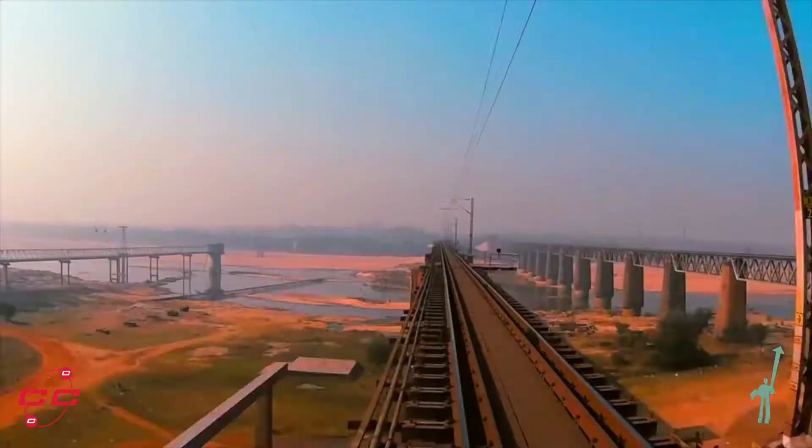The Indian Railways is the backbone of India's economy. Operated by the Ministry of Railways, it is one of India's oldest and most revered institutions. It manages the fourth largest railway network in the world. Such a large network requires over 70,000 running coaches in order to provide a safe, secure and punctual travelling experience to the public.

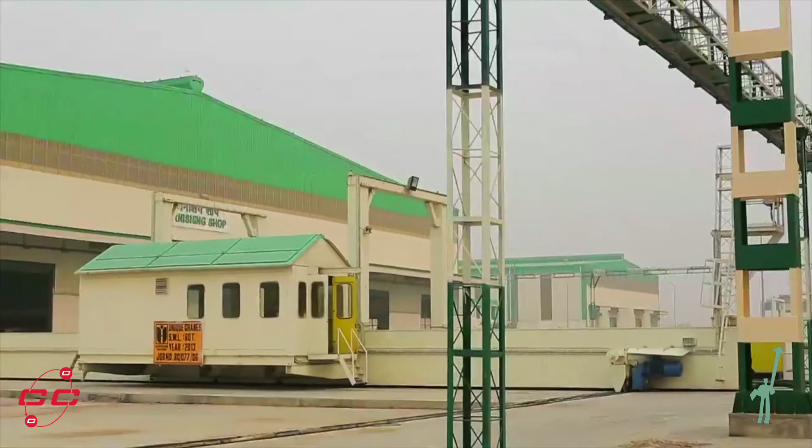The IR achieves that through coach factories located across the country. In 2007, the modern coach factory at Raebareli was set up to manufacture modern coaches. The factory is unique for being completely automated. It is the most automated production facility for manufacturing heavy vehicles in India.

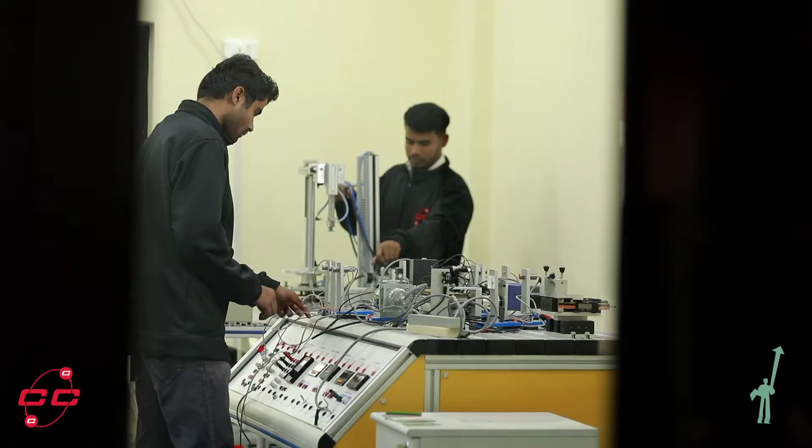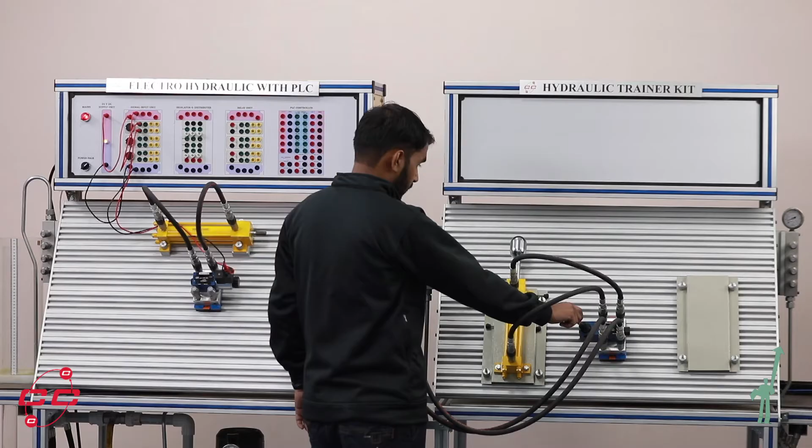In addition to the state-of-the-art production facilities, the factory is also home to a training center that promises to become a center of excellence in the field of automated manufacturing. The Mechatronics Lab and the Automation Lab are some of the facilities in this training center. These labs are utilized for upgrading skill in the latest technology for rolling stock manufacturing.

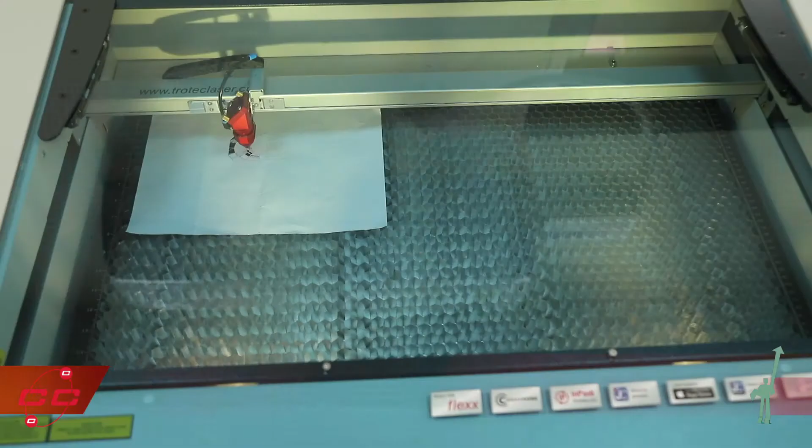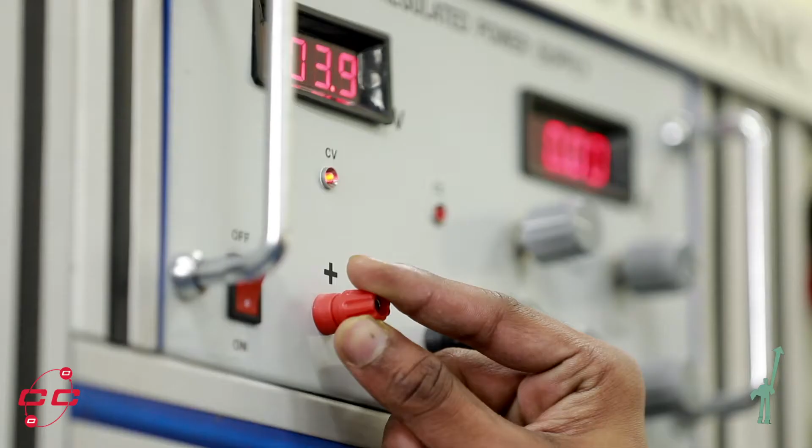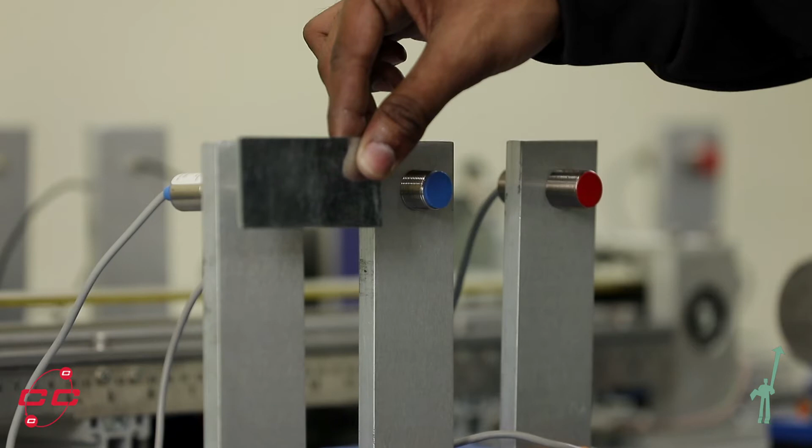The Mechatronics Lab is designed to skill MCF staff in the exciting field of mechatronics, which is increasingly recognized as a contemporary, integrative methodology used for manufacturing. Mechatronics is a synergistic integration of mechanical engineering, control theory, computer science and electronics to manage complexity, uncertainty and communication in engineered systems.

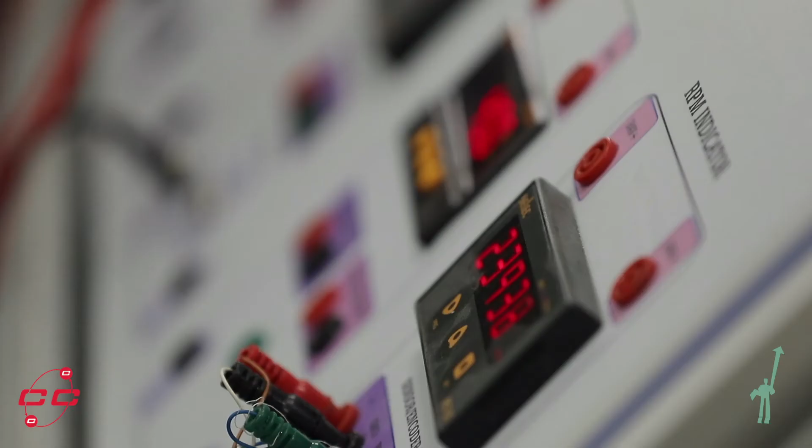The typical knowledge base covered comprises system modeling and analysis, decision and control theory, pneumatics, hydraulics, programmable logic control, sensors and signal conditioning, actuators and power electronics, and hardware interfacing used to optimize the production process.

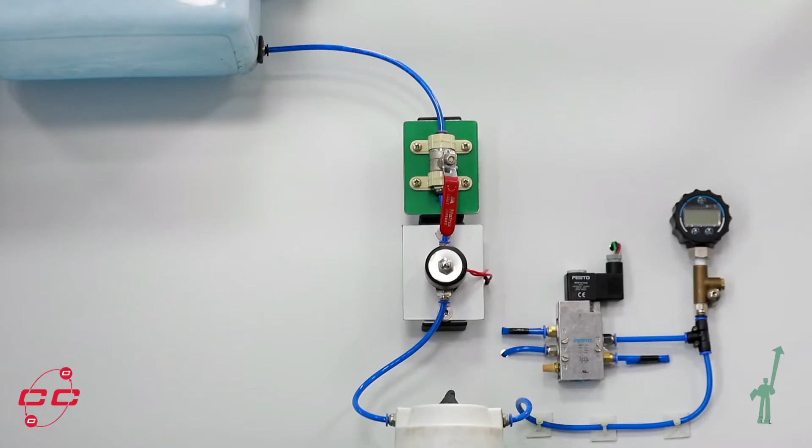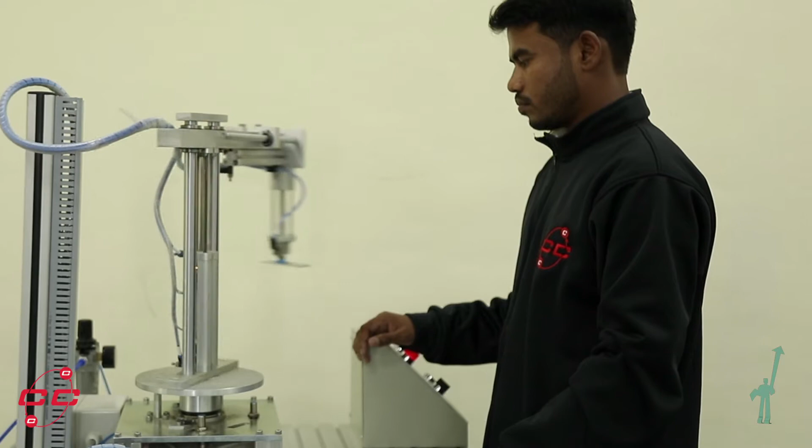The Automation Lab contains a plethora of systems, simulators and equipment that will utilize the mechatronics knowledge base to design automation solutions in a production facility. This lab contains robots of various types, including pick-and-place robots commonly used in production activity, and humanoid robots that are now becoming common in all fields of life.

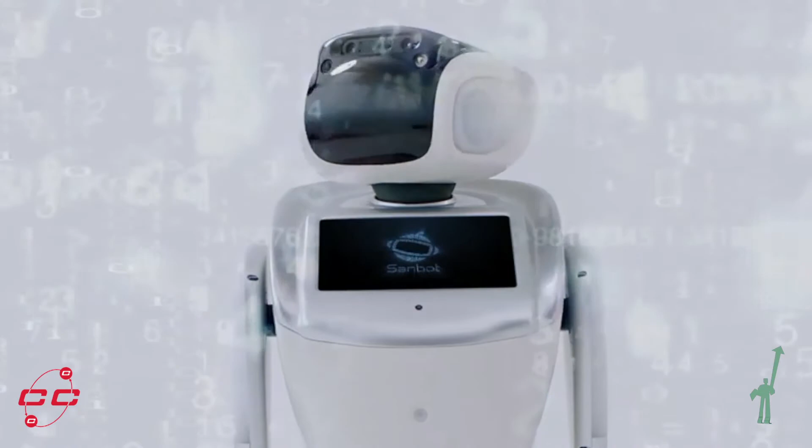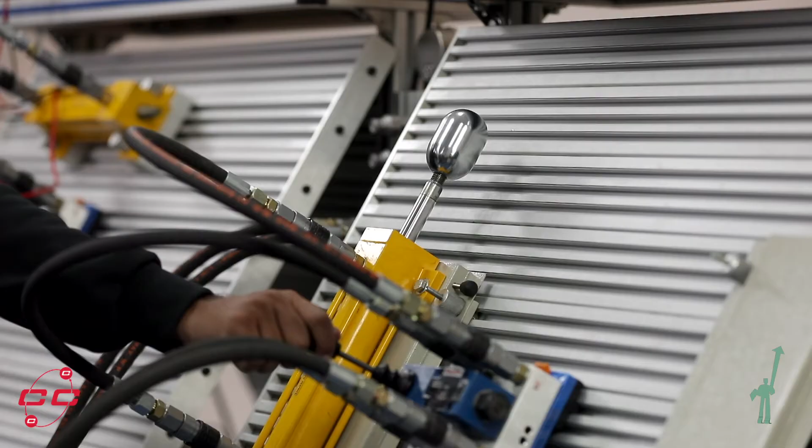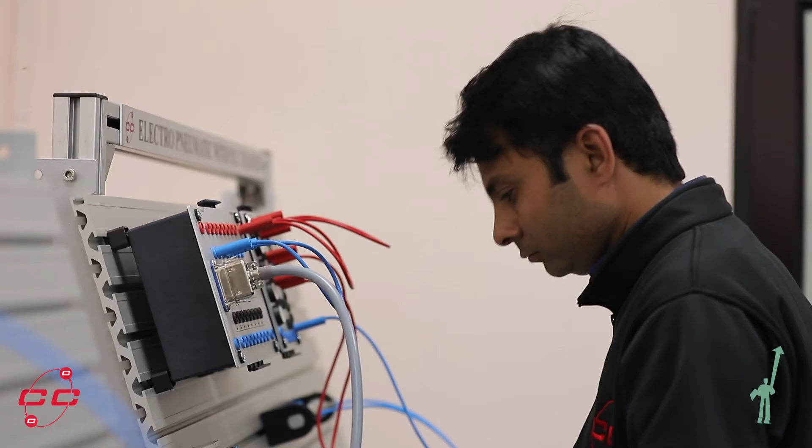The Automation Lab will help in transforming production technology that makes it possible to gather and analyze data across machines, enabling faster, more flexible and more efficient processes to produce higher quality goods at reduced costs. This is the foundation of the new digital industrial technology, that is, Industry 4.0.

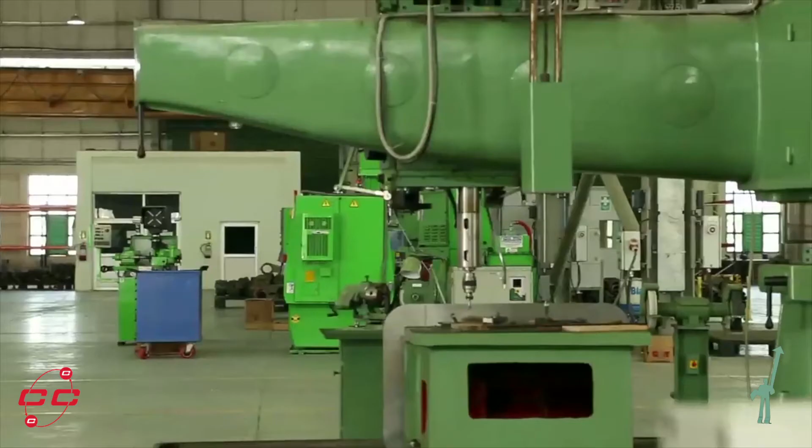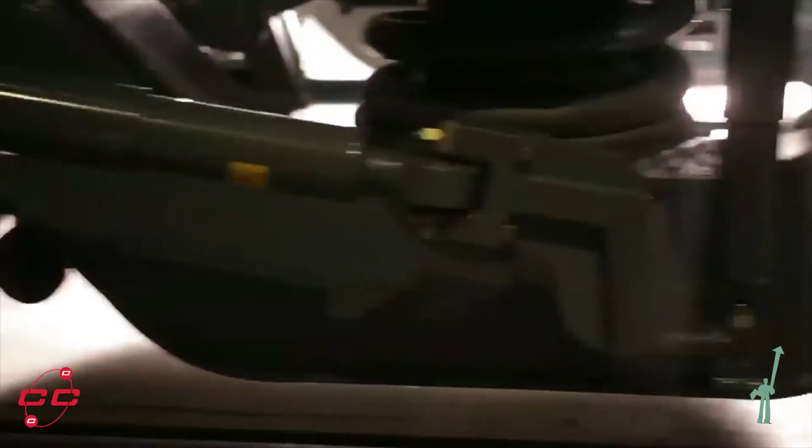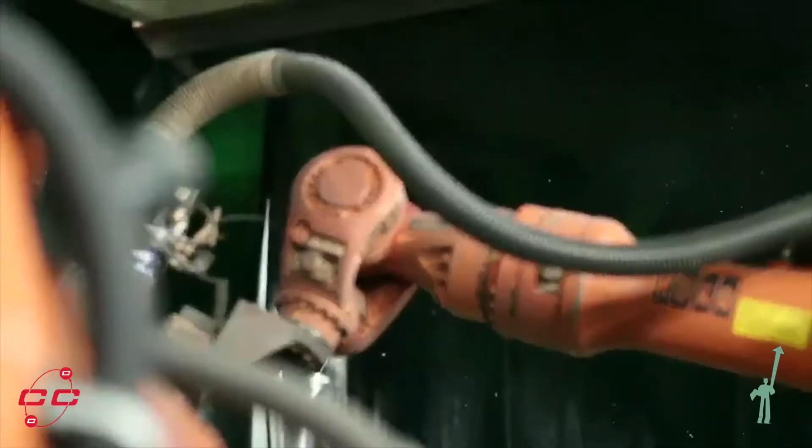This manufacturing capability will help the Indian Railways increase productivity, shift economics, foster growth, and modify the profile of the workforce, ultimately changing the competitiveness of the manufacturing units of the Indian Railways. With the capacity to produce high-speed stainless steel coaches, the modern coach factory is already one of the most productive facilities of the Indian Railways.

Its focus on automation has meant that it now also serves as a center for excellence in training for world-class coach manufacturing. MCF has also developed a center of excellence in automation, robotics and mechatronics. It is expected that MCF will become a central hub of Indian Railways for training its staff in advanced fields of automation and robotics.